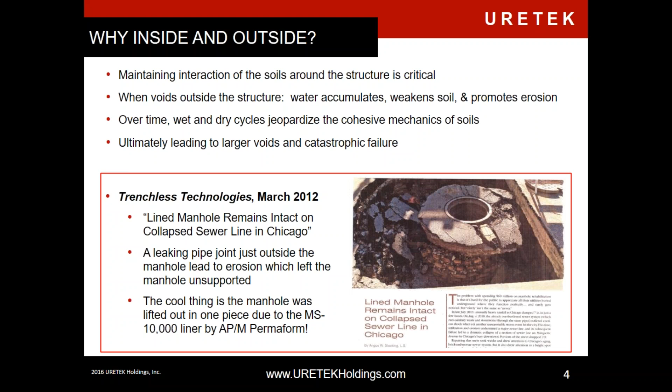In addition to those examples, we've also seen that I&I, inflow and infiltration, is a major sore spot for taxpayers as they learn more and more about it, because municipalities are spending money to treat what should be sanitary water, but instead it's actually stormwater that has gone through the leaks and cracks of pipe.

We had a January webinar with George Kurz, who did a third-party study on the state of Tennessee. And as you can see by the graphs, what has been circled and pointed out is that the flow was affected by the wet season and rainfall. This study covered 155 different municipal systems, and the research showed that 44% of the sanitary flow in Tennessee was actually stormwater. It was actually inflow and infiltration.

So if you spread that out across the entire state and you look at it from a financial perspective, they're spending $200 million on treating I&I, which is just something that everyone is looking to figure out how to stop.

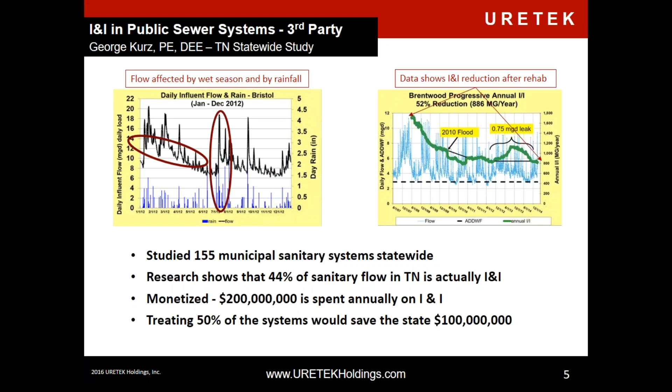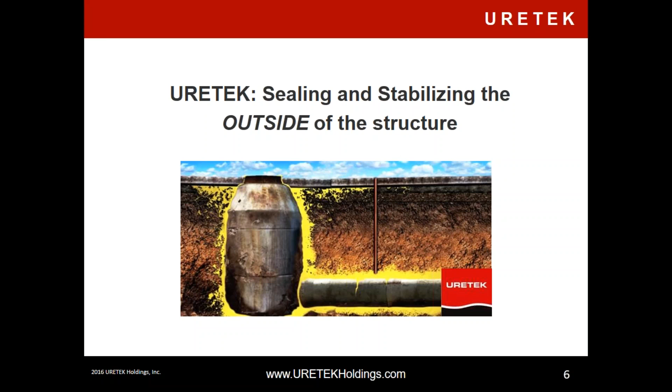So we will use our chemical grout. That is what is depicted in the yellow part of this graphic around the outside of manholes and pipes. It is an NSF 61 certified material. Basically, it's a two-part expanding chemical grout, a resin and hardener. They'll come together and expand to fill the void, displace any unwanted water, and then seal the cracks of the manhole and the pipe.

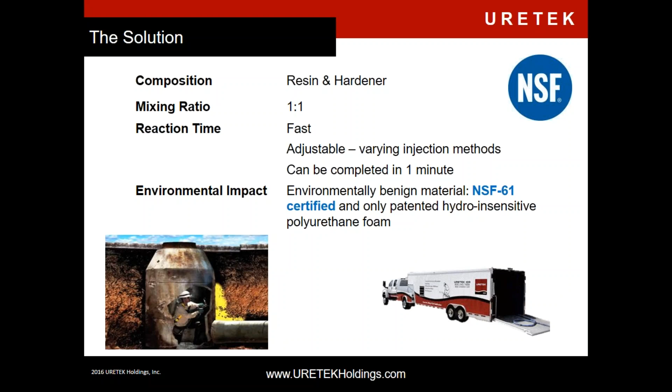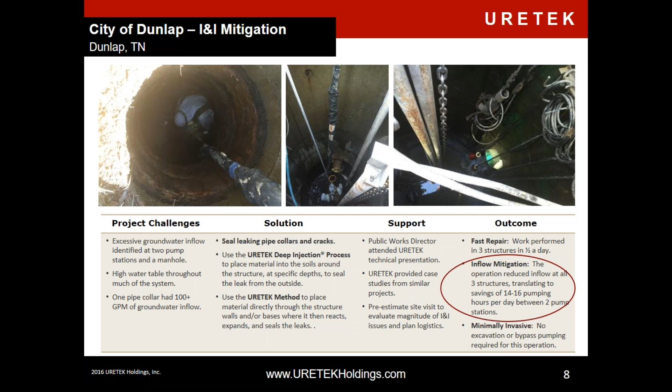Here's a recent example, not going through all the details of the case study, but in Dunlap, Tennessee, they had some I&I issues. Our team was able to get in there and stop the leaks in the manholes, such that we only treated 3 structures. But the City of Dunlap has started to do some quick math, and they are already seeing 14 to 16 pumping hours per day in savings. So instead of running almost the entire day long, it's now been cut to single-digit numbers.

This is another neat project that we were involved in. This is in Clarksville, Indiana, a suburb of Louisville. And we actually had the city of Clarksville speak on one of our previous webinars. And we only treated 7 manholes. I say only because of the positive impact that it had for the city.

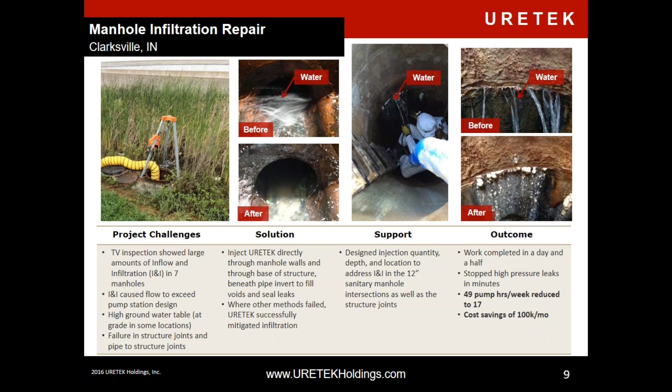So by treating only 7 manholes, stopping the I&I, and you can see some of the before and after pictures, we were able to reduce their pump hours from 49 pump hours a week down to 17. So showing a cost savings of $100,000 a month from just treating these 7 manholes. So now we're working with them to start to look at more within their city system.

This is just a graphic to show the reduction, how we were able to reduce by 65%. So the line graph shows the new cumulative hours compared to the old ones, which are the blue lines.

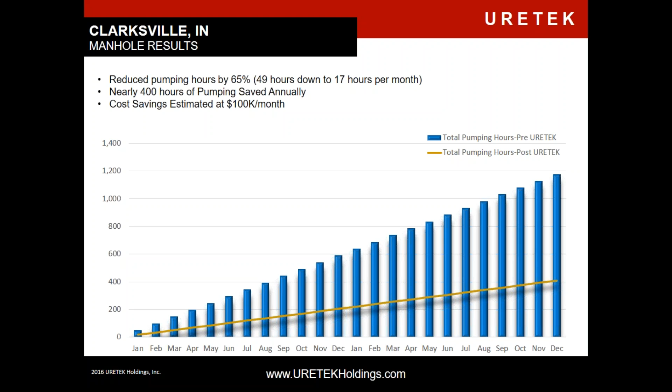On the last webinar we had, the City of Clarksville was very open about the numbers that they were looking at, from $750,000 for a new pump station, $500,000 to reline with CIPP. And obviously we left a little money on the table, but that's all right. We are there to try to solve the problem with what makes the most economical sense. And for $17,000, we were able to treat all 7 manholes.

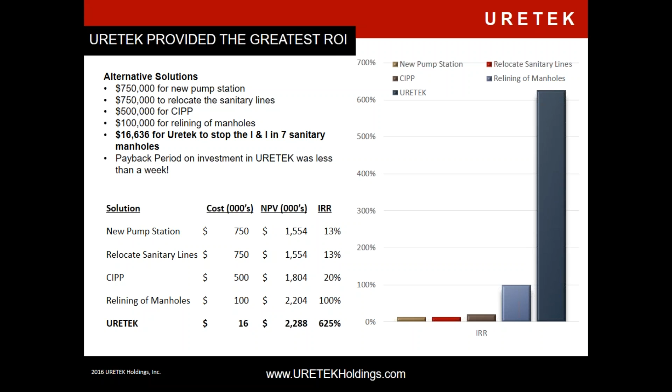So not every job, not every manhole will have that exact same cost comparison, so please don't get out the calculator and try to figure out a per manhole cost, because it changes. It all depends on diameter, on depth, on the voids in the soil, and really just the overall condition of the structure and the soil envelope. But regardless, usually it turns out to be much more economical than some conventional solutions.

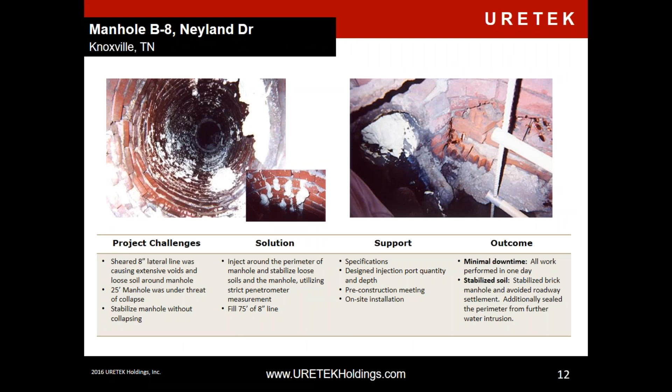We can also work with aged infrastructure, like a brick manhole. And then we have some very neat case studies on box culverts, such as this one in Alabama, where we were able to fill voids and provide an injectable barrier to redirect the water. If you see the before pictures, there's no water flowing inside the culvert. Obviously, it's all flowing underneath. Then we were able to reroute the water, so now it's flowing through the culvert like it should and no longer undermining the structure.

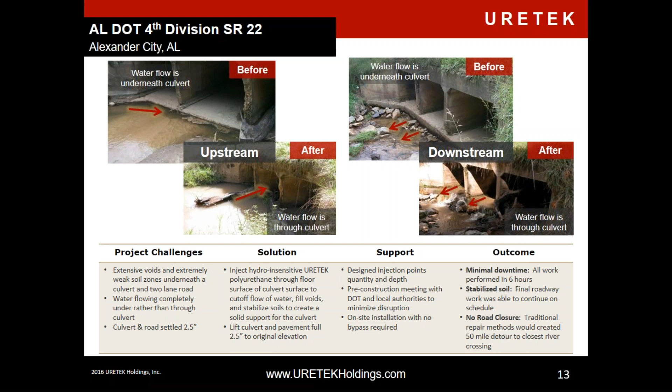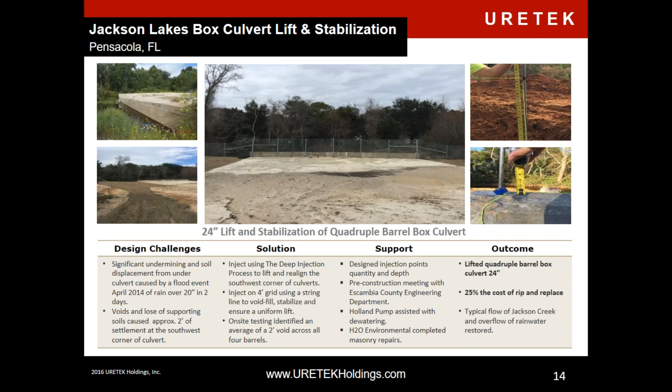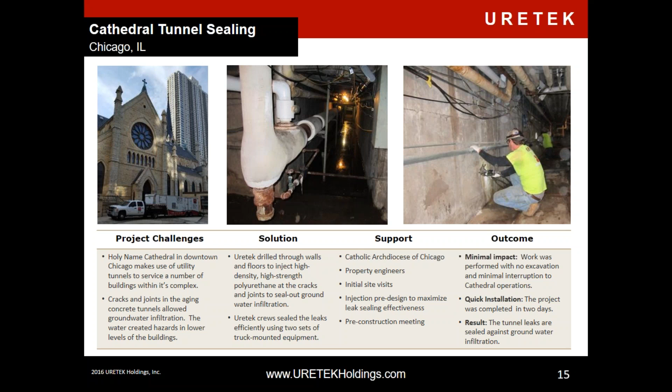This is a neat one that we did in Florida, where we lifted a box culvert, a quadruple box, 24 inches, and were able to lift it 2 feet using our chemical grout. Not only do we do infrastructure for storm and sanitary sewers, we're also doing things like stopping leaks inside tunnels like this church in Chicago. We also work in the commercial market, increasing bearing capacity, lifting structures, and stabilizing soil.

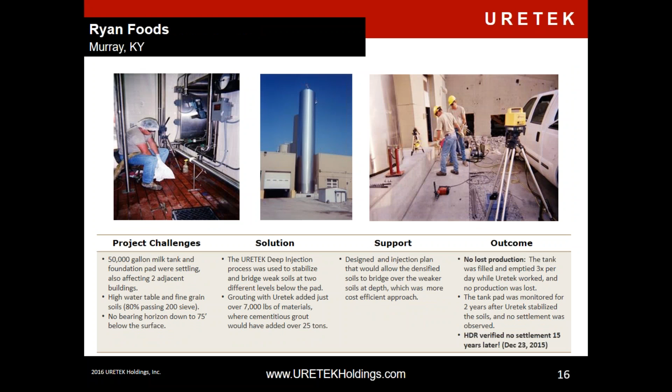This is an older project, actually done a little over 15 years ago in Kentucky, but the reason to show it is that just recently, in December of 2015, HDR went and surveyed the property and provided us a letter that the elevations have seen minimal to no settlement since our work in March of 2001.

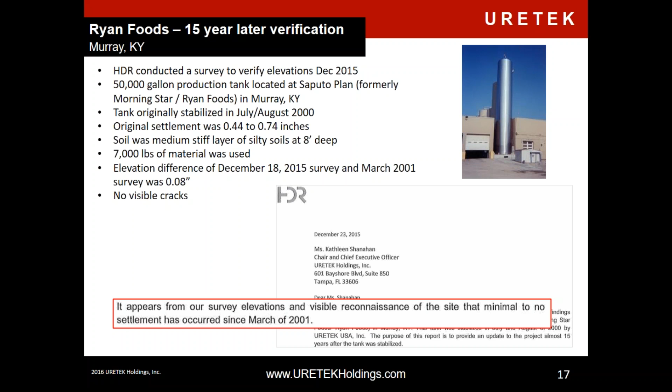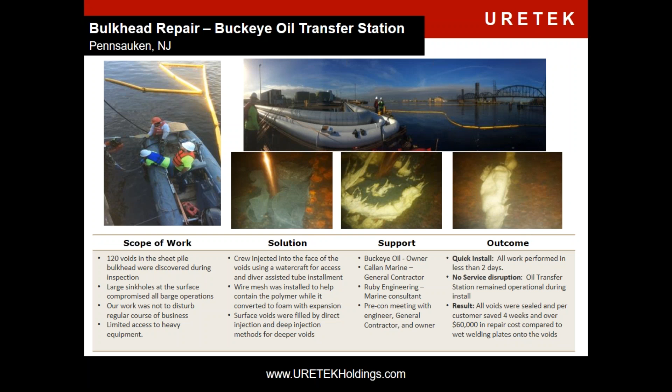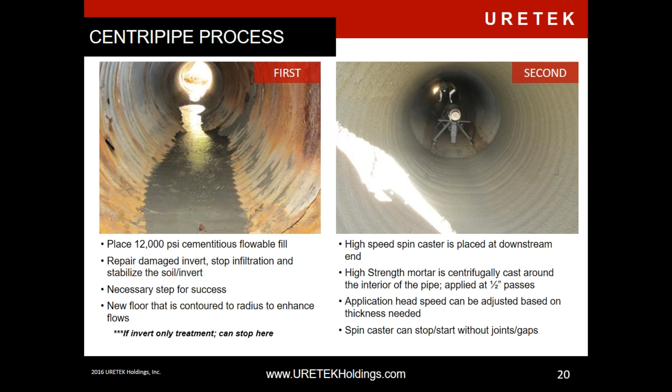You can see the picture on the left with a corrugated metal pipe that is deteriorated, but it's still holding its structure, but it just needs to be relined to extend the service life. So we'll fix the invert, and then we will use a spinner, as you see on the picture on the right, to reline in 1/2-inch passes, and we may just do a 1/2 inch if that's all it needs, or we may go up to a couple inches, just depending on the site conditions.

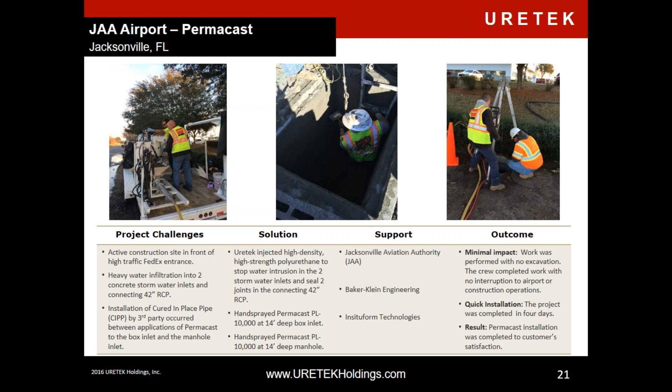Some various jobs, we can use that same technology inside manholes or vertical shafts. This is at the Jacksonville Airport, where we took care of a couple boxes there. And then some just various corrugated metal pipe pictures of various jobs we're using this technology. All the way up to 156 inch. So we will use a spinner for up to 120 inch. Anything beyond that, we will use basically a hand sprayer, hand application. It's the same engineered design mortar, it's just applied differently.

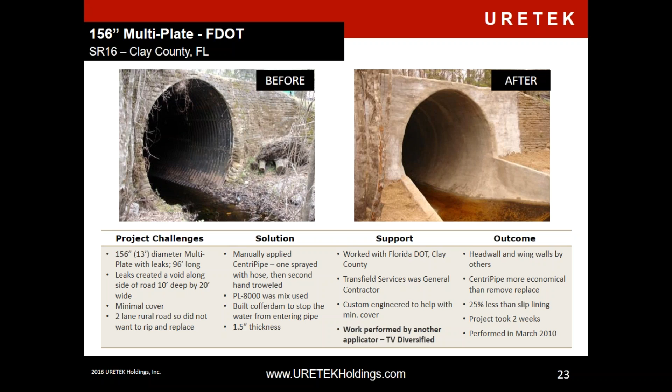CIPP needs to go from structure to structure, where with CentriPipe, it can start and stop as needed. And therefore, we don't have to go structure to structure, so you can just treat the areas of immediate need. So it was able to provide the city significant savings, yet treating the areas of concern.

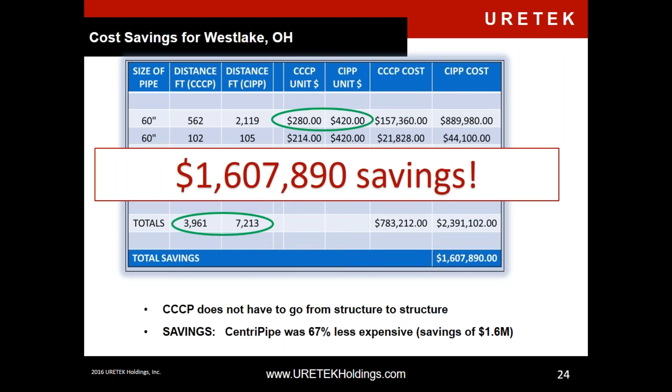So now I'd like to hand it over to John. John Boyles is the president of Inversa, and as we have been kind of going after this outside and inside approach in the marketplace, we were introduced to Inversa and put together a partnership that we are their exclusive partner for the 31 states that we cover in the United States.

And the reason we were so attracted to the partnership is, as we're treating the inside and the outside, working with DOTs and municipalities, there's a component of it that was just not known by the municipalities, and that was to get further upstream to understand what needs to be treated before it becomes a catastrophic failure. So by working with Inversa, they can put together that plan of, let's rehab this now, let's wait a year, or let's remove and replace. So by partnering with them, we were able to provide an overall kind of holistic view for these municipalities, DOTs, and engineering firms that work on asset management, and then work together to provide a solution.

So John, I'd like to hand it over to you to really share on the technology. So thank you for joining us today. Well, thank you very much, Corey. I appreciate the opportunity to be here.

So I am the President and CEO of Inversa Systems, and we really are enjoying our partnership with URETEK down in the U.S. It's helping us gain opportunities in the States which are otherwise very difficult to find, through their credibility.

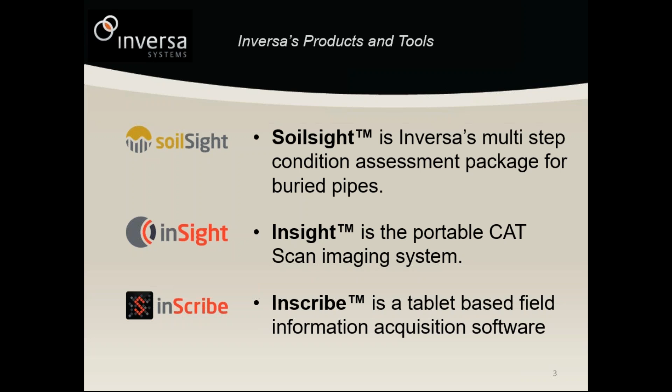Army Corps of Engineers to state-owned storm systems, sanitary systems, and roadway culverts, and really anything that is a composite material where you want to see through one layer and find something else about the layer beneath it.

So what drove this industry, in my view, is that a lot of clients, specifically DOTs and large municipalities, are really realizing that asset management is something they've been doing on their pavements and some clients on their bridges for many years, but their underground infrastructure hasn't benefited from that. Much of the underground infrastructure is at or past design life, having been installed mostly between the 1950s and 1970s and having only a 40 or 50-year design life.

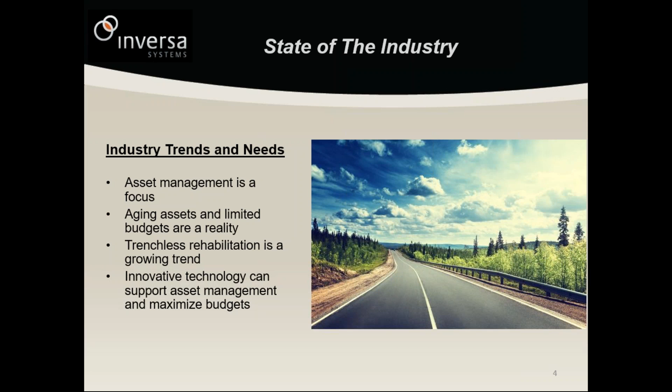And so what they really want to do is transition from a reactive to a proactive management strategy, which involves knowing information. So we've chosen to focus on one specific aspect for this PowerPoint, which is really relating to storm, sanitary, and roadway culverts, corrugated metal pipe. So corrugated metal pipe, most of the load-bearing capacity is in the soil surrounding the pipe. And we want to avoid voids forming.

And these voids form for a variety of reasons. One is corrosion, through-wall corrosion, so water that does make it into the pipe but then facilitates its way outside the pipe and starts carrying soil away, typically in the haunches first and then expanding around the pipe envelope. Sometimes it's scour and it doesn't even make it into the pipe like Corey talked about and flows underneath it all the way. And other times it can be related to things like embankment failure or potholes holding water and slowly sifting through the soil and then hitting the top of the pipe and washing soil around it.

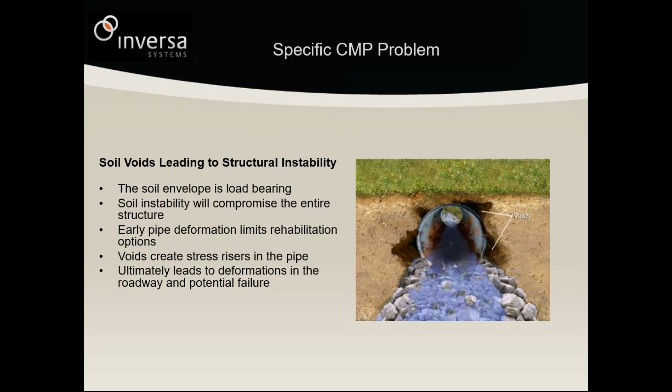And then sometimes it can be related to broken storm systems up or downstream that pump water through the ground unbeknownst to the client, and eventually you get a big cavern forming behind your pipe wall. So with CMP pipes, because they're not a fully structural, rigid structure on their own, you rely on the soil. There's a ton of it installed across North America, and it's fundamental that we don't allow water ingress on the outside of those pipes.

So the analogy I always give is, I think fundamentally we all understand that if you take a part of your body like your heart, you've got some choices with your heart's health. You can either eat well your whole life and even still have problems, or you can monitor it after a certain age and you can say, look, I want to proactively look after my heart's health. Okay, I'm going to go to the doctor. Well, how do you feel? Okay, well, maybe we should do a blood test. So that's the first level of condition assessment.

Oh, you have some high cholesterol. That means you could have other issues. Let's do maybe an X-ray. And an X-ray will look if the area around your heart has maybe any tumors, if everything is where it should be. And then they might say, okay, everything is okay, but you're still showing some signs. We better do a stress test and an angiogram. We're not going to open your heart up and replace it. We're going to simply look if those capillaries and veins and arteries coming into your heart are potentially clogged. If they're clogged, we have relatively non-destructive ways of fixing that for you in the form of a stent.

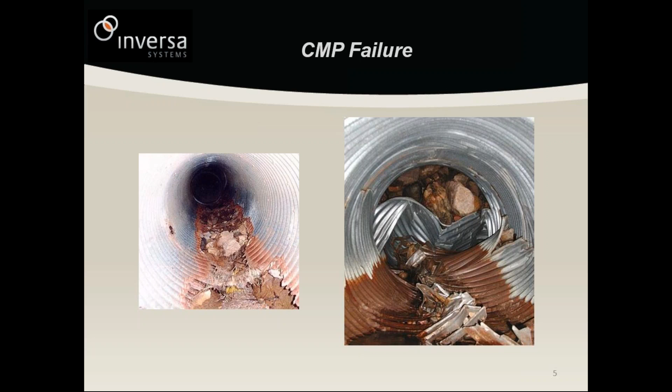So the way we go about doing this is, as I said, one step at a time. Most people are very familiar with visual inspection. What I can tell you from working around the globe on this is that clients' visual inspection protocols do vary quite a lot. Some are far stronger than others. It varies everything from stick your head into the end of the pipe once every 5 years to some clients every 2 years do full confined space entry and do walkthroughs.

So what we did was we decided that one of the biggest barriers to us doing business is we get one of two types of clients. Clients that say, okay, can you give us the best protocols? And we want to be able to undertake the easier steps for ourselves, in which case we are happy to facilitate that with the proper training. 99% of those clients initially want us to enable them, and then they come back and say, you know, you guys really do add a lot of value. Could you do the service work?

My company does not want to be a service provider. We want to be a technology enabler. So we work with people like Eurotech who have more staff and more offices to do that on our behalf for the clients. So visual inspection can be simple, but if you know what to look for and you really are trained on what failure modes to measure for, it can be very rich information.

So we have built a tablet, or you can use it on a laptop, or you can use it on your phone, but it's a protocol that forces a client or the client's representative or our inspectors through the same rigorous measurement process. So it does not matter who is collecting that data as long as they follow the protocol. But it's crucial that you do or you lose all of the value of the inspection.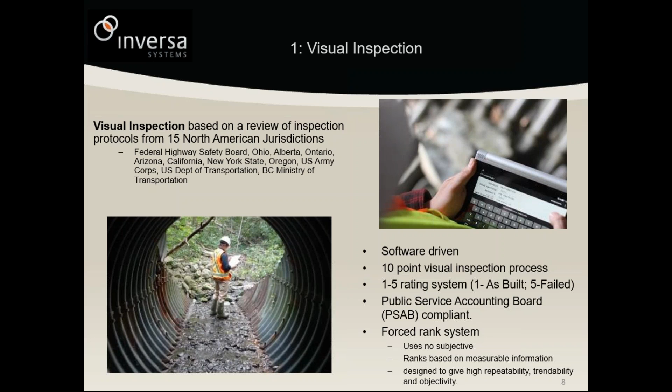This is a 10-point visual system, basically following like a PACP type process where 1 is as built and 5 is failed, and then each of the 10 criteria that we physically measure has an auto-generated comment system and then an extra comment system for inspectors to add. So it forces a particular ranking.

We also have rigging that can go off of bolt heads, rigging that can go off of ladders, and rigging that can go off staging. So there's a variety of delivery mechanisms. Setup time typically once the first setup is done is 5 minutes, and a scan is anywhere from 2 minutes to 8 minutes. And what you get is a BCT CAT scan image, backscatter computed tomography.

That's the top right. What you want to see is the area that measured no void. That's perfectly compact backfill as you'd like to see. You see it transitioning the void in the middle, and you see entire void on the right-hand side. What clients say about this is it's nice because it's conclusive.

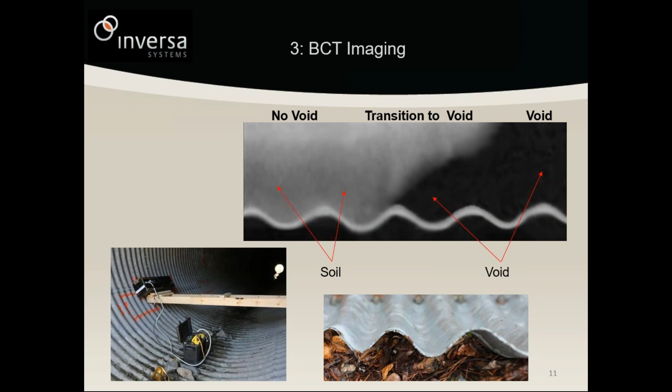For clients that have used ground penetrating radar, it's a blip on the screen that you need a PhD and a postdoc to even make any sense of, and even when they do tell you that, and that's what I did my grad school in, it still isn't very clear. This is absolutely conclusive. So here's what I meant by a pipe map.

Now, don't try and squint and look at that. Just sit back and look and know that that top view is one half of your pipe barrel, cut down the center, and the part below it is the other half of your pipe barrel. And the reason why we lay one view over top of the other view is because then you can really tell a story of what's going on without even necessarily needing to spend the money on a CAT scan.

So what you can tell here is when we overlay this onto your GIS, you know where the pavement is above it. So this particular pipe is about 340 meters long, so 1,100 feet. There's 4 or 5 lanes of traffic on each direction above this pipe. But what you can tell looking is the black rectangles are acoustic anomalies. So these are areas where our inspector heard quote-unquote hollowness but made no judgment call about it, simply mapped it all out.

Black dots are where there's visual indicators per our protocol, and there's a table that goes with this that would say, you know, visual indicator number 1, through wall corrosion 4 centimeters by 5, or rooftop deformation, ovality, whatever those signs are. But when we show this to the DOT engineers, they stand back and go, okay, now, gee, we have all of our problems concentrated underneath the westbound lane of traffic. And if those black rectangles all do turn out to be void, this pipe is in major failure mode.

Whereas in this case, the dead center of the pipe, why is that in particularly good shape? And then why are there all of these visual anomalies clustered on the top part of the pipe underneath the eastbound lane of traffic? So there's a lot of information that when we sit down with the engineers, we can tell from this. The other thing we can tell is, okay, before you waste the money on radiation inspection, let's presume all of these black dots and black rectangles are void. If they are, what do we know?

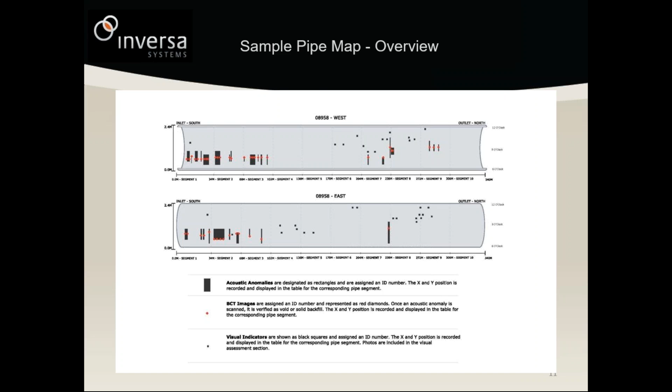So from that overview of the pipe, just to show you the level of detail we go to, every single section of the pipe from feature to feature is divided up with a detailed table. And what this means is lots of times our recommendation to clients is, guys, you don't need to do anything to this pipe today. Just stop. In 2 years' time, take these same measurements again. We can overlay one set of data on the other and see if things are changing.

Maybe a lot of those voids are actually caused by poor construction practices in 1950, and it's not actually transient or moving. It is okay, but once we know exactly what's wrong, we can compare it from one periodic inspection to another. So we measure visual, acoustic, and BCT images.

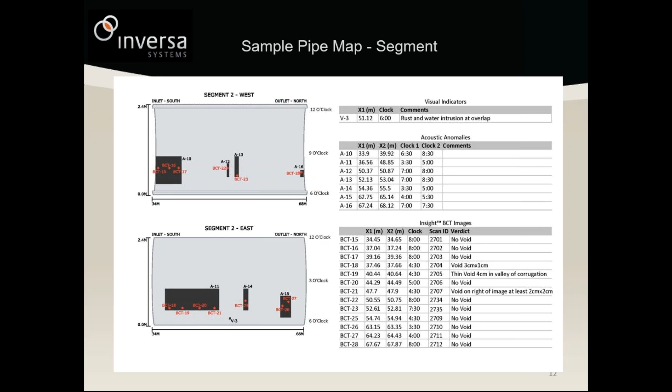Here's an example, a neat one. Canada's largest city, City of Toronto. There was a 16-foot diameter pipe, beautiful visual condition. We did acoustics. We had concern on one wall, but nothing that you wouldn't rank as sort of an 8 or 9 out of 10, but it was underneath 8 lanes of traffic and 16 feet in diameter. So we figured we should probably BCT it. We BCT'd it and we saw this. It was a 16 by 16 foot cavern stretching from the top of the pipe all the way to the bottom.

We wouldn't have normally done this as part of an inspection, but we went 500-600 feet downstream. Because the stream was so wide and rushing so fast, we didn't see all of that soil building in the outlet pool. It had gone all the way downstream to the first turn in the river and built up on the bank. Because we can tell the direction that the water piped in from, this led us back to a broken storm system 100 feet away up the road, and all of the storm runoff on the road was going into the storm drain, which had a crack and was pumping through the ground, hitting this culvert and finding its way to the stream.

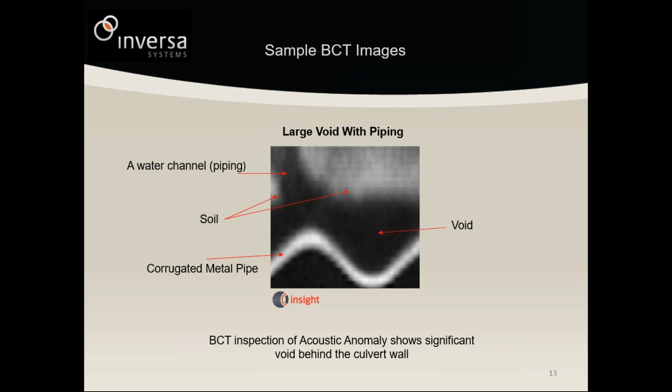So this was something that probably would have brought down 8 lanes of traffic if it wasn't addressed, but a very inexpensive grout injection job and a full other design life. So this is just a neat example, for a very big asset owner, of the value compared to just doing a visual inspection alone, or even in this case, just doing visual and acoustics without doing follow-up.

So one of our neatest case studies is very recent. It's still going on. Phase 1 of this was a study for the New Brunswick Department of Transportation and Infrastructure, which is our word for DOT.

These guys have about 10,000 of these large diameter pipes. They said to us, we're overwhelmed. We do a very good job of asset management on pavement and bridges. We don't know what to do with all of these pipes. Can you help us? So we focused on a network-wide approach.

We first did a desktop study that said, okay, how do you prioritize these assets today and what data do you have? So a desktop study. Is it age that you use? Is it diameter? Is it risk profile associated with strategic haul roads, in our case being a rural province? Or is it ambulance routes? Or is it detours? Or is it depth of fill? So we do an analysis on all of those on a network-wide approach.

We chop that down into, say, as an example, 10%. So over 10 years, you can move it through 100% of your assets. Well, 1,000 pipes is still a big amount of pipes. So how do you go further down the list? Well, you further refine that top 10% in terms of priority based on things like comparative replacement cost to rehabilitation cost. Once we've taken the risk profile of public safety out, then it becomes about money.

So we do this to get down to a manageable data set where we go in and we start adding asset by asset detailed information on pipes that we suspect are the highest and most costly. So phase 1 for us in our initial year, which was last year, we did 15 of the large diameter ones. They asked us to do both condition assessment, all forms of it, then write up a rehabilitation design plan if required, and give them an answer.

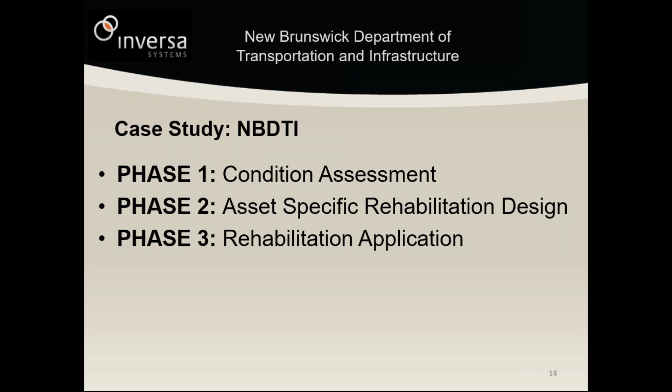What we said was, DOT, you provide us your cost of replacement for both a CMP and bringing up to today's standards. So basically, if you were to replace it with exactly what is in the ground versus what you would do today. So we had 2 numbers given to us by the client, and then we were to do the calculations on the rehabilitation design and show them their savings. This year, we are actually undertaking the rehabilitation. So let me show you about that.

So the 15 assets went down to 14 because I think one actually failed before we got there. Of the 14, the criteria we used to drive this was they were large diameter, they were deeply buried because we have a lot of rolling hills, which means their cost of replacement is fairly high, and they have limited deformation so that the majority of the rehabilitation options are open to you. So that was phase 1.

Phase 2 was, what are the results? So number 1 was one asset we recommended for replacement. It was too deformed to save them any money on rehabilitation. 4, which they had panicked about and actually thought needed replacement because they did walk through them, hit them with a hammer, and they rang terrifyingly hollow and you feel it vibrating underneath your feet. But when we validated all of that, it was just a little bit of fines that had washed away, and all they need is a water stop collar and some riprap. Well, 4 of those are available for continued monitoring. 9 of the remaining ones were excellent candidates for trenchless rehabilitation.

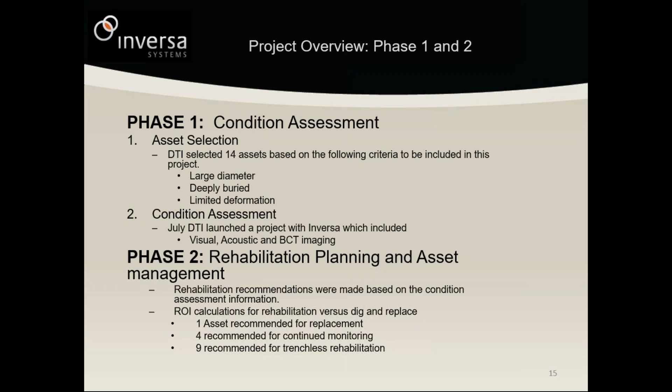So now what we're doing is we're undertaking the rehabilitation. So this involves doing the construction permitting, because this is fairly innovative around here, providing design plans to them, doing all the logistic management, taking care of the material, and subcontracting out the work. So it's more like a design build because they've learned to trust us. And then we have to decide which rehabilitation method is the best and provide all the project management QA/QC.

In this case, a lot of the pipes were very suitable for CentriPipe. And CentriPipe is what Corey had actually talked about. Very useful in the size of the pipes where CIPP is no longer an option. Slip lining severely reduces your hydraulic capacity, which is usually one of the problems with these older assets to begin with. SIPP is another one that's considered. And CCCP. And CCCP is usually far and away a winner for cost. So we considered all of those different methods.

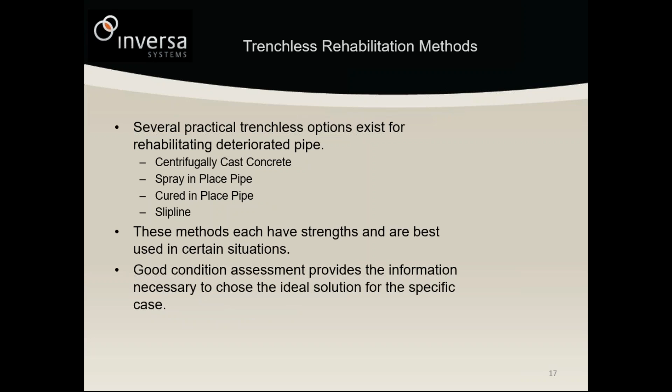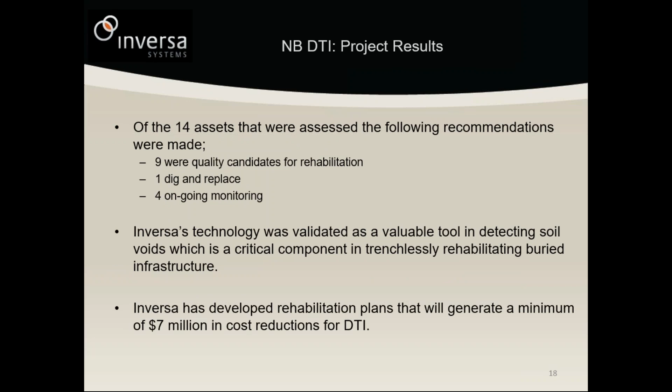We provided an ROI comparison to the client, and we ended up being able to save them $7 million of direct cash-on-cash comparison. That's based on replacing it with CMP. It was upwards of $16 million in savings when comparing it to replacement with concrete. This is something that the client signed off on, and here's an example of one of the assets.

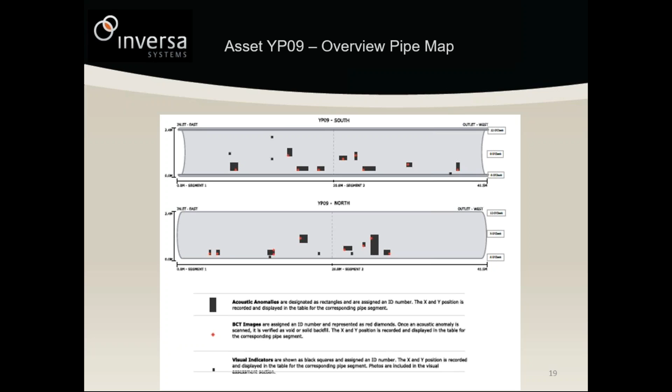So this particular asset is one of very interesting engineering criteria. If you take a look at this pipe, you can see from its left wall and right wall, termed south and north view, that most of the problems were concentrated underneath the road. And there was flow-related type failure present, which you can see by most of the black blocks being in the haunches, but there was some around midline too. And those ones are where you really get concerned.

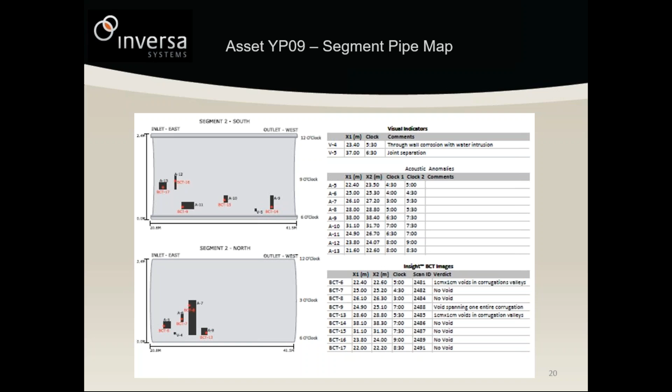This particular pipe ended up, though, only having very minor voids, limited to mostly the valleys of the corrugations. So that means a very, very good candidate for fixing whatever joints are separated and then putting a new liner in that pipe so all of the corrosion would no longer allow water to flow behind the pipe wall. So this is what some of the conclusions would be.

So on that pipe, there were 17 of these acoustic anomalies, of which we validated 5 as voids and did a grout injection plan for them. The corrosion was bad, but the ovality was good. The deep fill made trenchless rehabilitation an excellent candidate for rehabilitation. And then we did an actual rehabilitation design.

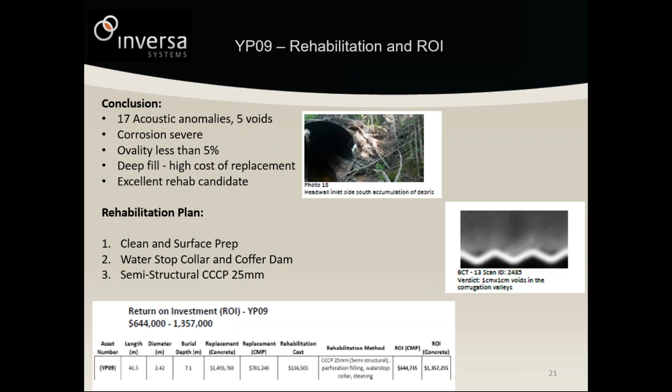And at the bottom of the screen, if you can't quite see it, the ROI was almost $700,000 for CMP and about $1.3 million for a comparison to concrete. So this is one of the candidates we're actually doing a rehabilitation on this summer. This is another neat case study.

This is in Edmonton, Alberta, for Alberta Transport, which is one of the largest entities in Canada that uses these CMP pipes. This was a very long pipe under a divided highway. This is one of their crucial highways that connects Fort Mac, which you might hear about with the big fire going on right now, where all of our oil comes from. It was a big pipe. It was about 2.4 meters in diameter, which had very interesting differential failures.

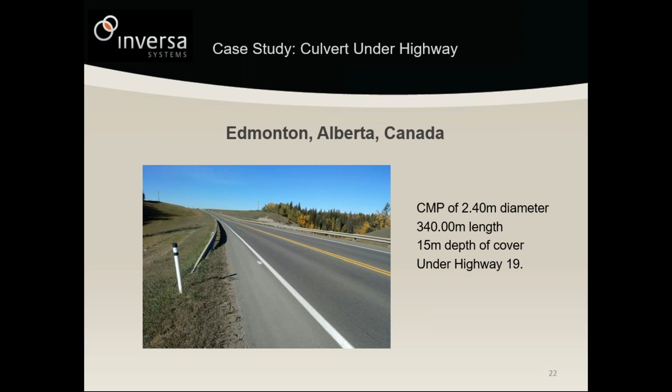So at one end of the pipe, you can see there's a lot of acoustic anomalies. The whole middle section, though, that's almost 200 feet, was okay. And then there were some mid-pipe sections that were failing on the outlet end. So if you look at some of the ovality measurements we made, they were upwards of 20 to 30% ovality on certain sections, but only in certain sections.

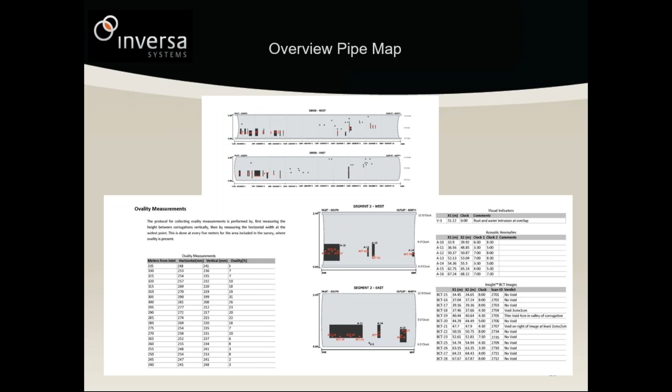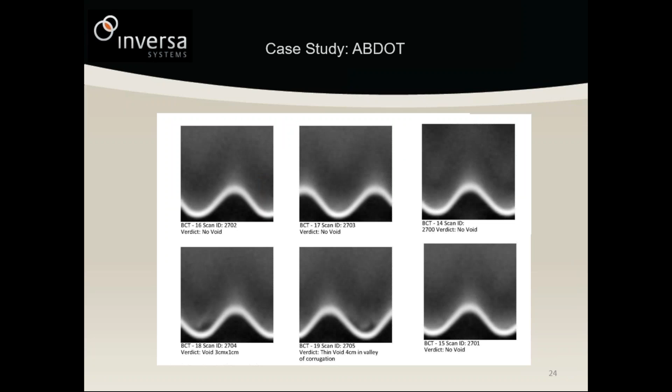So we actually were nominated for a minister's award on this pipe because what we found was there wasn't a lot of reason to panic for voids. As you can see, the voids are very small from these BCT images, but they were suffering from very different types of failure. And a lot of it was due to ATV traffic on the embankment, on the outlet end.

So we actually were able to show them that of these anomalies that they were panicked about, 34 visual failure points, 30 acoustic ones, we did 44 BCT images in one day. And there's only 3 locations of soil void. So we designed a rehabilitation; for them it was a $16 million dig job because it was so deep and the traffic bypasses, there were no alternatives.

So we actually were able to show them that other than a few specific areas, this pipe is in good condition. So why would you dig it out? And they were planning to tunnel bore as their alternative for this one, a huge pipe, which who knows what it would have disturbed on the surface. So we were able to show them, look, you can fill these few voids, you can do some localized repair. From station 0 to 270, you don't need to do a whole lot.

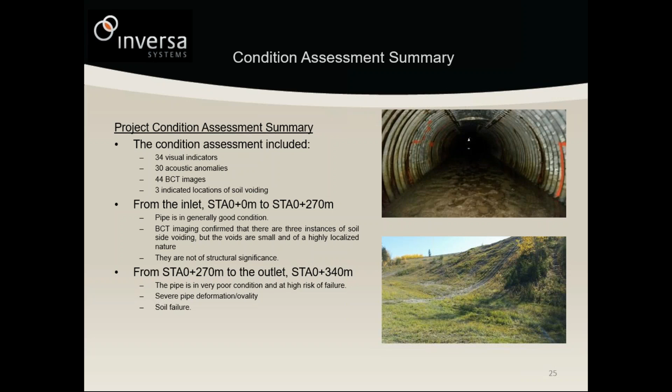You can put in a new center pipe liner or some other liner, which is very cost effective, but on the very downstream end, you need to dig that out because the ovality is too big. But that's on the shoulder. So we can just cut off and connect the new outlet end to that pipe and then reline that so you have one continuous section of mono pipe, so there's no chance of future water ingress. And we were actually able to save this particular client, I think it was almost $7 million.

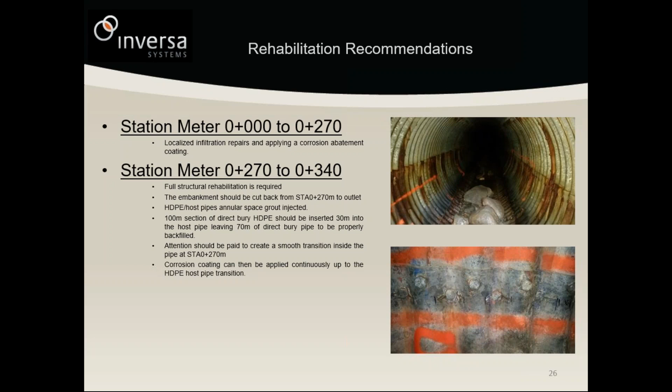We're looking at some fairly significant projects for these guys. Just in case there's stormwater people, since I've been talking about culverts, I'll quickly cover a storm system case and then I want to leave time for some questions.

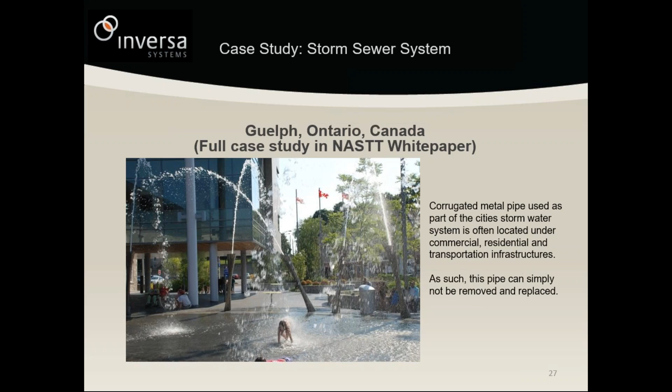This is underneath Canada's largest highway and arterial, the 401 heading into it. This is a city right beside Toronto, our biggest city. A 1 kilometer section of storm drain, and these guys had scheduled it for digging it out because they were panicked about what could be under it, and they were going to pave, so they figured they'd dig it out. This was, I think, a $12 or $13 million dig job. We completely avoided the whole thing.

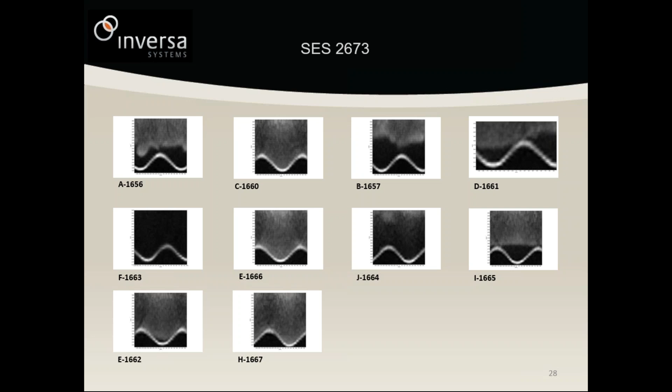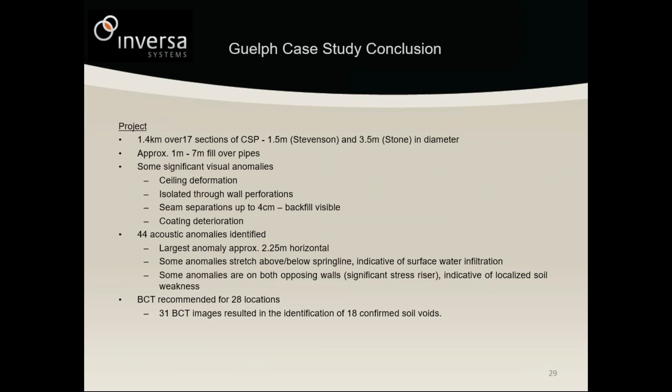We mapped out all of the anomalies. You can see there were some significant voids in these pipes, and there were some unsupported sections, but nothing that couldn't be grout injected. So we designed a rehabilitation plan for these guys. There were 44 anomalies within the 1 kilometer of pipe, and we found 18 large soil voids, but we were able to map them out for them.

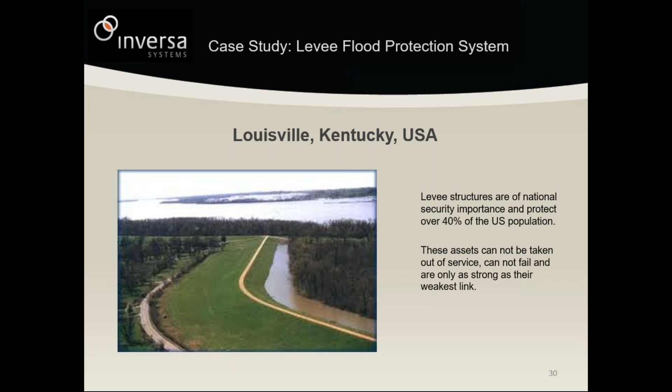This is a neat one, maybe more pertinent to our U.S. clients. This is in Louisville. I'm sure a lot of you are familiar, a lot of levee systems. So these are Army Corps assets. We were brought in by MSD Louisville to look at some, I think it was 5, for the most part, and tributaries.

These clients had these weird failure modes, which you see here. You can actually see the imprint of the corrugated wall in the top right. In the instance, you can even see the through-wall corrosion. You can see the print of the wall, and what was going on here was they have high clay content, and the soil pulls away from the wall slightly.

The soil by the bottom of the pipe buckling up due to buoyant forces and water underneath the pipe. And so you can actually see the entire pipe is slipping out from underneath the embankment, and there's about a 2-inch offset. It floats the pipe and it slides it a little bit. So this was a very interesting one, that required a very creative grout injection plan with wall anchors that would help hold this pipe in place. So it just sort of shows some of the stuff we can do.

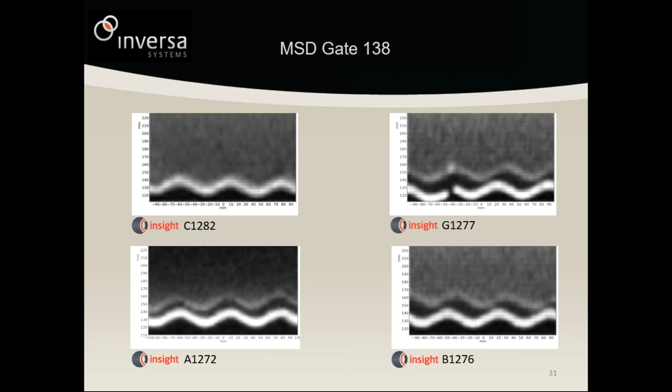On this job, we also found a very unusual thing. They had done some slip lines on these pipes with HDPE, snap tight, and this contractor actually pressure grouted it and failed the pipe. It buckled, and they spent almost a month hand chiseling this out of a 30-inch pipe that was 300 feet long because they couldn't get equipment into it. Fired the contractor, hired a new guy. He did a ton of these pipes for them so fast, they were all impressed.

The Corps was happy. We went in and we looked through the HDPE wall, and what you want to see is what's in the top left. The density of the grout, almost similar to the density of the plastic wall, and it's continuous. The right-hand image, we looked way through the HDPE wall, and you can actually see a slight shape of the corrugated wall behind it. That's in the roof.

The contractor cheated, and he didn't actually grout inject the pipes. He just capped the head walls, and everybody thought he was so fast and so good. They fired the guy that was doing a good job. He just pressure grouted a little too much on one pipe, and they hired the guy that was a crook. So this was really interesting because the Corps really latched onto this and started to develop different grout standards. From what I understand, it's all stuff that's confidential to us, but this was a big deal for us at the time to find that.

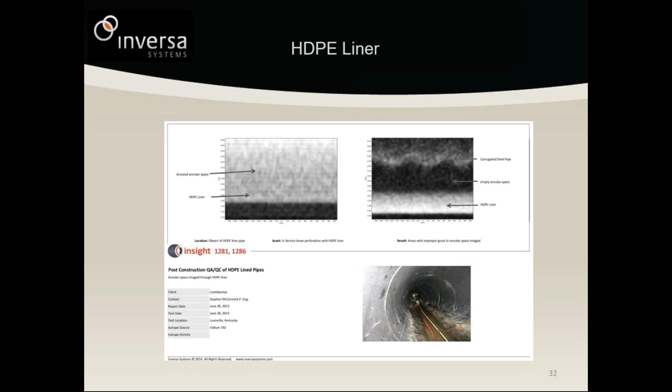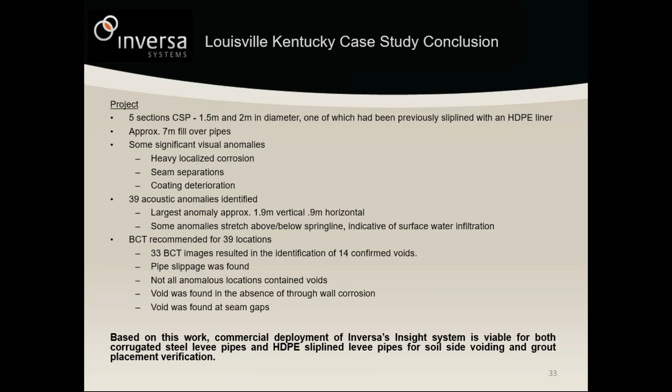So Louisville, here's some summary. There were about 39 anomalies, 14 large voids. And sometimes the voids were even found in the absence of through-wall corrosion, which means that they were pulling away from the wall, like I was saying, and there were a lot of embankment issues due to gophers, I think. There was some sort of critter that dug holes. Yeah, so I guess overall, this is sort of summarizing everything.

What we're hearing from clients is they want proactive asset management, but it has to be cost effective because everybody's budget's constrained. We don't mind putting our money where our mouth is and showing them that we will not even charge you if we don't show you and find you savings. So unfortunately for us, most people say, oh, come down and do this one emergency job, and then they start looking at bigger studies. The cost seems prohibitive when you look at one pipe at a time.

When you start looking at many pipes at a time, just like pavement monitoring, your cost per lineal foot goes down very, very quickly. So at the end of the day, we end up being able to do network-wide asset management plans driven by very, very data-rich information. We can help the clients facilitate their own data management, do it for them. We work with the clients in any way they want. We can show them how to do it themselves. 99% of the time they want us to use a local contractor like Eurotech, and then we sit in the background and we provide data and engineering support.